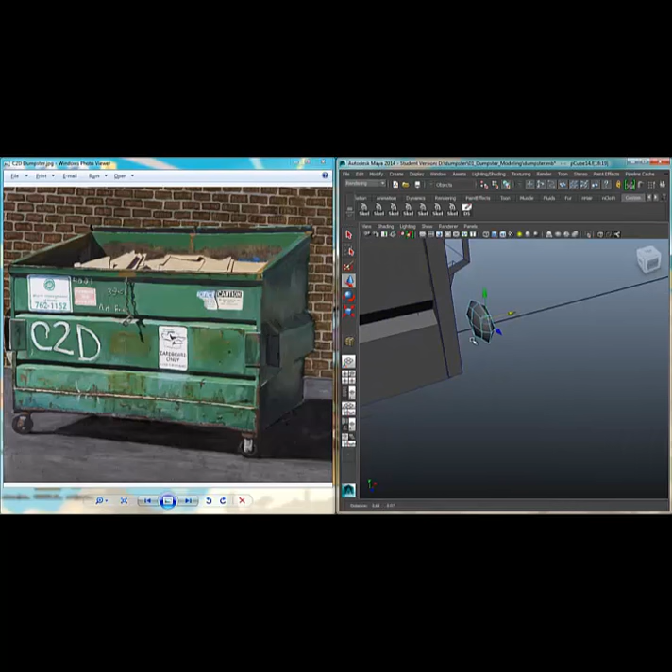Now I'll select these faces here on both sides. Let's just start with this side. I hit R and flatten it. Same thing here, just kind of flatten it out. Then I could take this edge and, depending on how I want the wheel to look, adjust it. And again, so there you have a completely quadded out cylinder.

So I'll position that down below. Let's go to our front view and check these dimensions. Let's move this up just a little bit and push the size of our wheel.

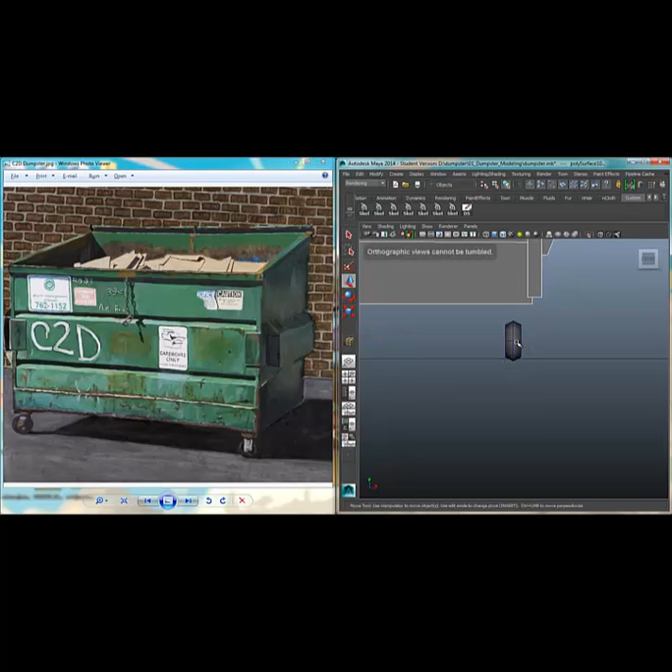Alright, now in order to make this bracket here, I'm just going to duplicate my wheel. Let's go to front view here, lop off half of this, flatten this out. And again, I'm going to delete these top two faces, they're not needed.

Alright, and I'm going to use my bridge tool again, and the same down here, but this time I'll hit G to redo last action, then go to edge mode. Let's hide this guy so we can get a better look. There we go, edge mode, and just fill this triangle. Shift right click, fill. Alright, let's move that in place.

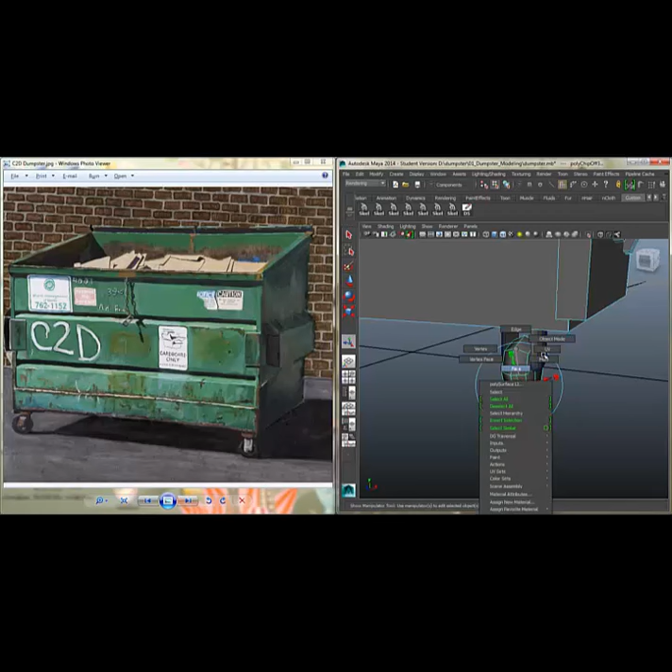All I'm going to do is go to face mode and again duplicate my wheel. Flatten all these faces out here, scale it out, delete these top faces. Maybe pull this in a little bit more.

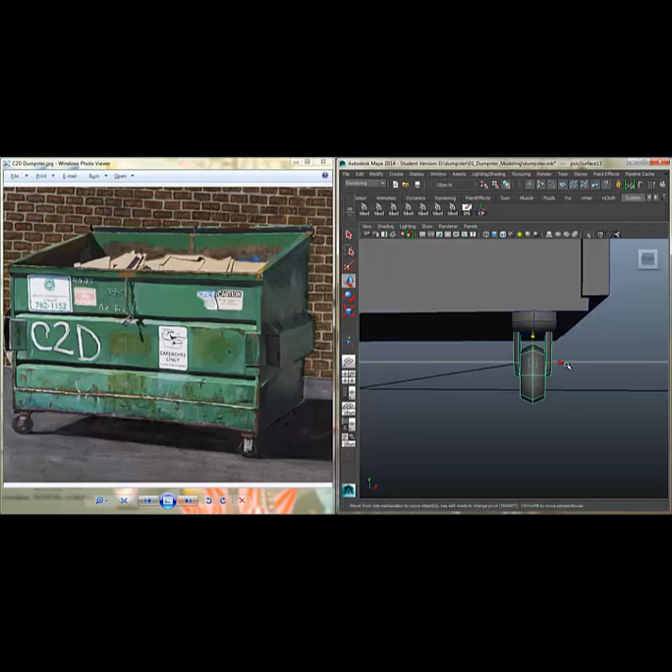Alright, let's pull this down. Combine these guys, I'm going to add center pivot to my custom bar, scale this in a little bit. Combine all three of these, center pivot on that. And again, go to front view and just double check how it looks. Doesn't look bad.

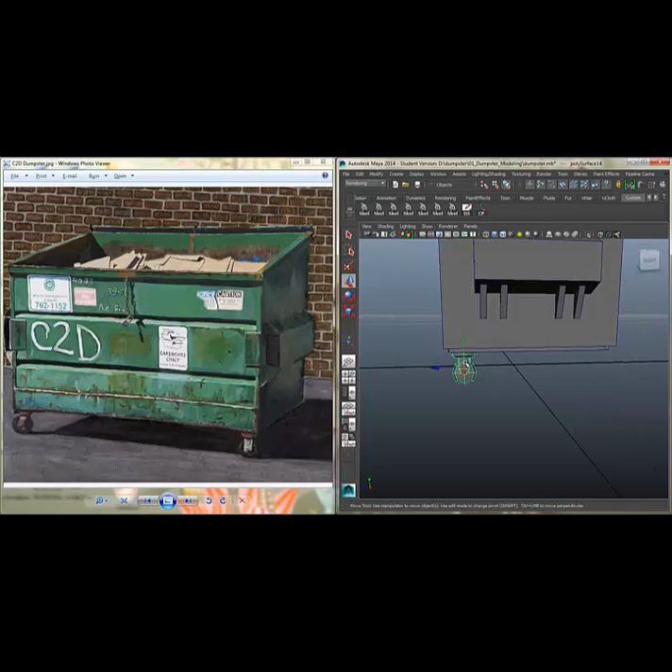So you can play with rotating it like it is here, but I'm going to leave them straight for now. I'm going to Control D that to duplicate it, and I'm just going to combine all those pieces.

Alright, let's create the lid. I'm going to go to my top view here. Now it's going to be two separate lids, so let's go to our side view. And I'm actually going to hold D down and just move my center pivot back here.

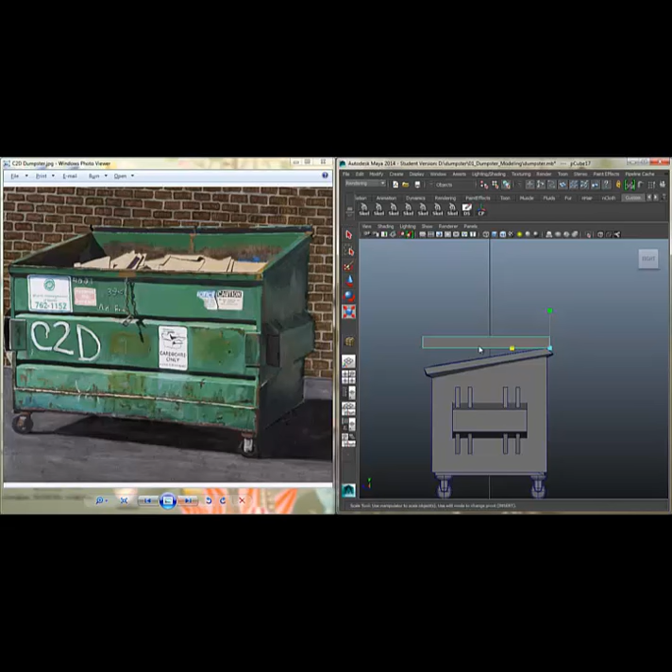Then I want to scale this out so that it's the length of my dumpster. What you'll notice is once you do that, you'll be able to shut it, but leave it straight for now. Let's give that a little more, because I want to model some of the rivets you're not seeing in this picture. We're not going to go crazy here, just a couple of them.

So we'll do 3 there, 3 in the middle, 3 here. Select each one of these center edges, pull them up. Then I'm going to select all of these edges here, shift right click, harden edge, just so I have that.

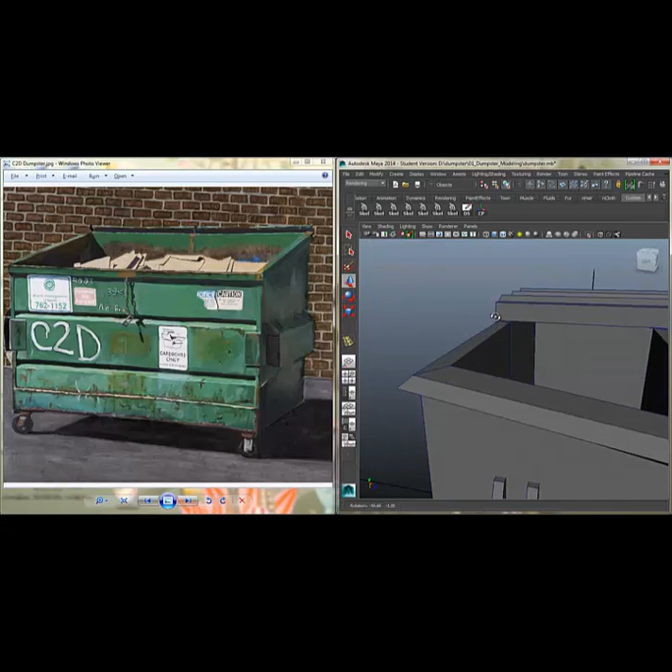They're not perfect, and I highly suggest you go in and tweak them so they look a little better, but to keep these tutorials a reasonable length, I'm not going to tweak everything. We don't care about all these extra edges at the bottom, and when it comes to environment modeling, I don't really care much about triangles. I care more about that with things that are going to animate.

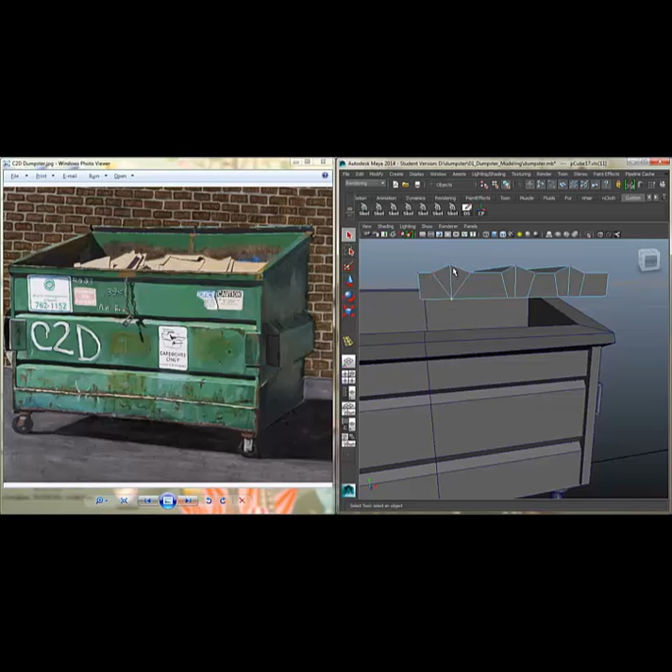So I'm going to shift right click by selecting these 3 edges. Again, shift right clicking here, going up to merge vertices, merge vertex to center. Then I'm hitting Q to have my selection. Select the next 3, hit G. The next 3, hit G. And let's rotate, do the same on the other side.

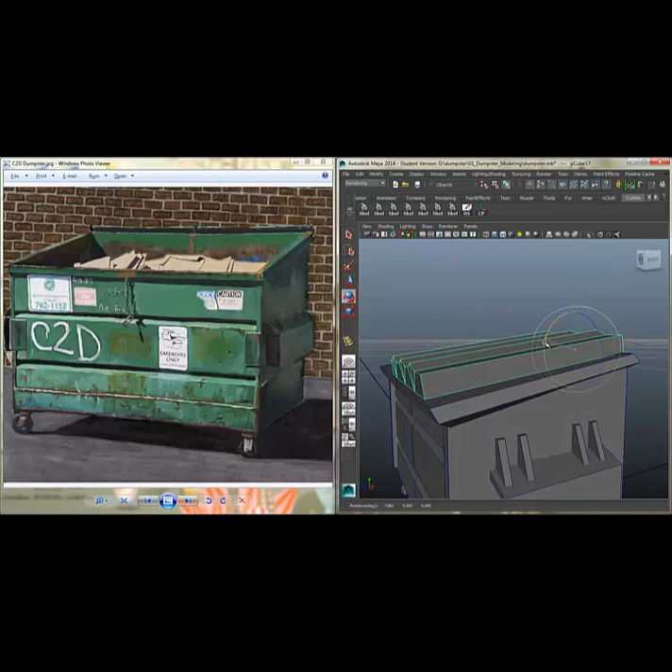Now, ordinarily, because this is going to be something for an Android app, I would go further and take this vert and weld it up to here. But I don't mind it being a little high, because I might go in and tweak the shape of this, beat up the lid a little. This really isn't that great, it's not a special object by any means. It's just going to be in the background, and if it's a racing game you'll see it for a split second, but we might use it in other games.

Alright, so we've got this. Again, delete this, select both of these, combine them for now. Duplicate special just to see how it looks. I'm going to select these verts and pull it in just a little bit.

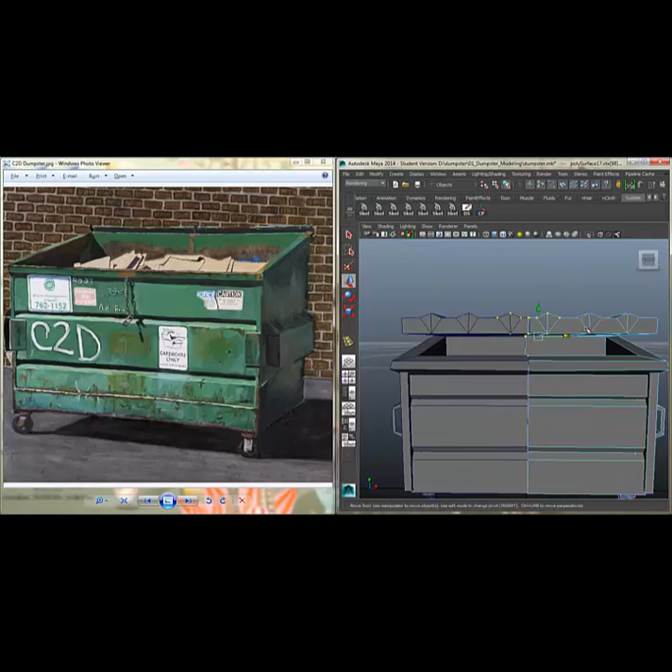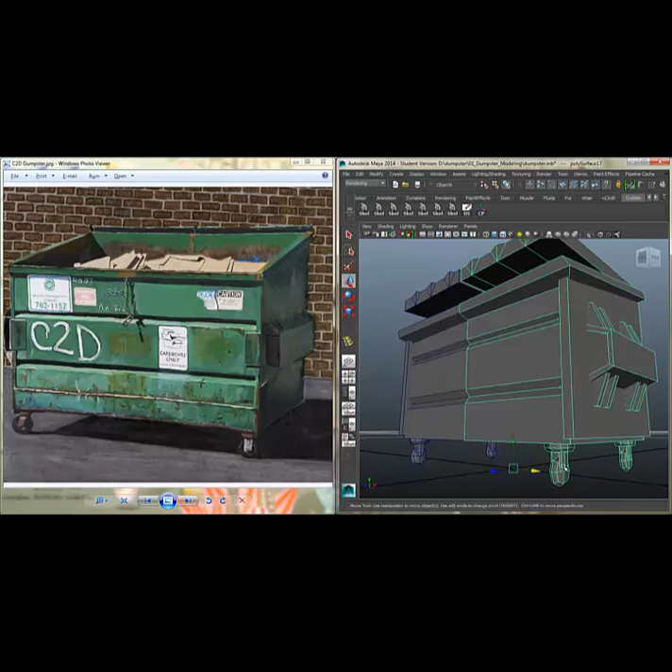So we've got a bit of a gap in our dumpster lid. Alright, you can model out the metal bracket that goes there. I'm pretty sure at this point, if you've done the other tutorials including this one, you should be able to create another one of these cylinders out of a box and do that.

I'm going to go ahead and end this video here. This is pretty much done for modeling, and we're going to take a look at unwrapping in the next video.